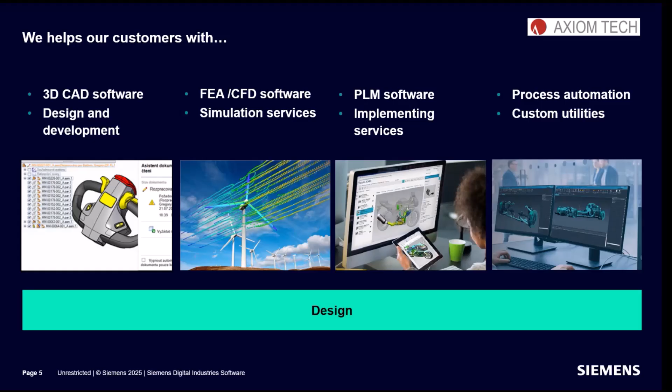The second main area of digitalization that we cover is generally manufacturing. We provide our customers a comprehensive Siemens CAM solution for generating machining code according to the 3D model of the parts. We also supply post-processors, which translate the NC code and ensure correct production of the part on a given CNC machine tool. We also supply verification software for machining.

This kind of software allows you to take the NC code and verify it for collision with the spindle or other parts of the CNC machine. It can then modify the machining NC code before production to make the machining more efficient, thus producing the part faster and without the risk of any collisions.

We also provide tooling management solutions, and as in the design area, we offer PLM solutions to manage processes and resources for production. We also offer PCM software implementation that can calculate the cost of manufacturing a part very accurately based on the analysis of the part's topology.

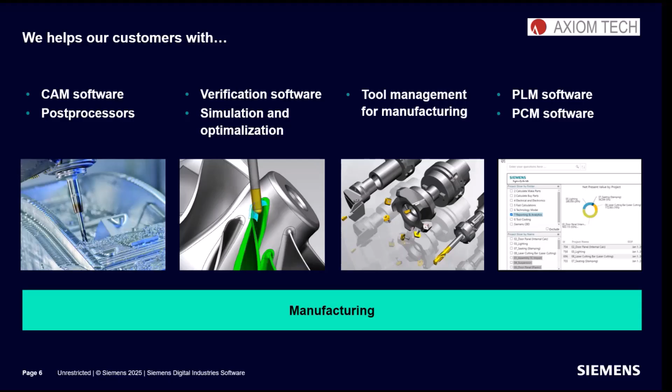The third area of digitalization in which we operate is software solutions for the digital twin of production itself. In these solutions, the customer has a complete 3D model of the production, which can be used to simulate the entire production process. This digital twin allows us to analyze all bottlenecks in production, such as various downtimes and carryover, and can offer optimal solutions to remove these bottlenecks and increase productivity. Simply put, it is a software solution for making production processes more productive.

We also offer solutions for advanced operational planning, which can be linked to various ERP systems to automatically schedule production orders for individual machines and workstations.

This enables the customer to schedule orders automatically, including eliminating downtimes, waiting for inputs, or missing resources.

Furthermore, within this area, we also offer software that is used to validate the design of the entire production line with robots and manipulators. This is a solution that will verify the feasibility of automation, robot reaches, or line flow, and can simulate the entire production line while also allowing offline programming of industrial robots and virtual commissioning.

In summary, for all these main areas, design, technology, and production, we can link data, automate data transfers between different software and ERP systems, simplifying the work of designers and operators.

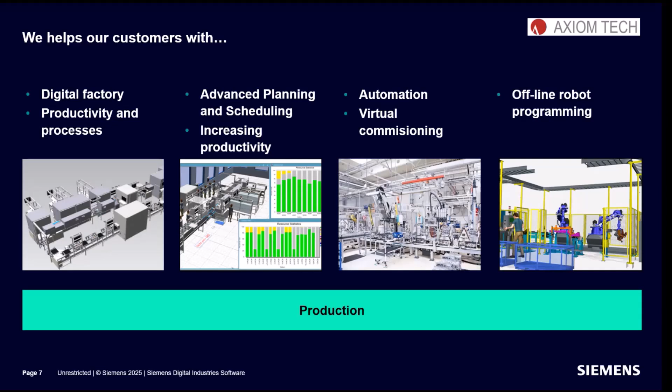So now let me introduce you to ROBE Lighting Company.

ROBE Lighting is a global leader in the world of professional lighting solutions. ROBE was founded in 1994 in the Czech Republic, and from the very beginning, it has been driven by innovation, creativity, and strong focus on quality.

The company designs and manufactures intelligent lighting fixtures that power some of the most impressive productions around the world, from concerts and festivals to television, theater, and architectural installations.

ROBE is also known for its commitment to developing sustainable, reliable, and future-forward lighting technologies. Over the years, it has grown into a respected brand trusted by lighting professionals across many industries.

ROBE isn't just a leader in lighting tech, it is a true global player. The company employs over 900 people worldwide, and its products are distributed in more than 100 countries through a strong network of subsidiaries and distribution partners.

ROBE handles its entire development process in-house, from research and design to manufacturing and testing. Everything is based at the company's facility in Valašské Meziříčí in the Czech Republic, and this allows ROBE to maintain strict quality control, remain flexible in innovations, and deliver consistent quality on a global scale.

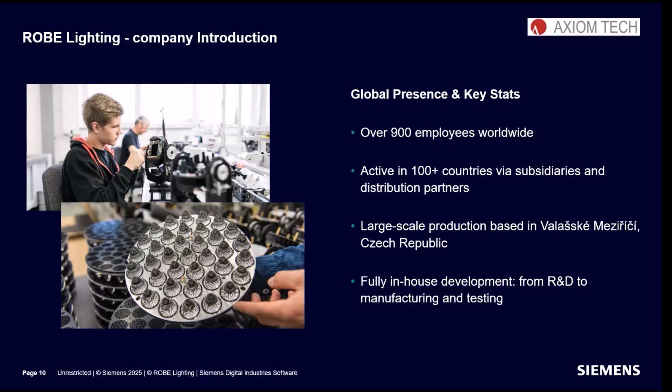Let me share with you one interesting fact. ROBE was one of the first companies in the Czech Republic that purchased a commercial desktop 3D printer, and they used it to print prototypes of plastic covers for its luminaires, which significantly contributed to accelerating product development.

So the key to ROBE's success is commitment to technological innovation. The company offers a full portfolio of intelligent lighting products, including moving heads, wash lights, LED effects, and many more. What sets ROBE apart? It is focused on durability, performance, and optical precision.

Their fixtures are engineered for demanding environments, from live concert stages with frequent handling to controlled broadcast studios. ROBE has earned its place at high-profile events like Eurovision, and it's regularly used in large-scale live shows, corporate events,

and permanent installations. The company also leads in energy efficiency and green design, working to minimize environmental impact and extend product life cycles. So simply put, ROBE is lighting the future with innovation.

So ROBE is also deeply invested in customer success. They offer comprehensive support, training, and education to lighting professionals around the world.

Their products consistently win awards for design and innovation, and their team continues to push the boundaries with each generation of lighting solutions. Overall, ROBE is a company that understands both creative and technical challenges and who can help elevate any lighting production to an unforgettable experience with their future-ready tools and products.

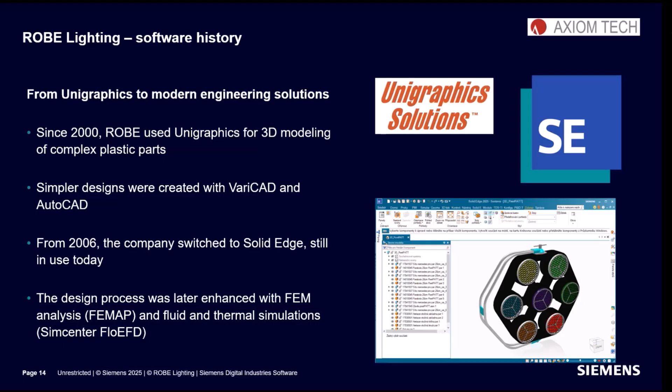This tool is essential for the design of LED module cooling, optimization of ventilation within enclosed fixtures, and simulation of heat dissipation from electronics, for example.

Now let's take a look at some practical use cases where ROBE's design department has successfully used Siemens Solid Edge software solutions to significantly help increase the productivity and quality of their products.

The first use case is about challenges in the design of bent sheet metal parts.

In the area of sheet metal part design, ROBE Lighting has long faced a challenge based on the high variability of the material used. Aluminum and steel sheets are processed in a wide range of thicknesses, and this variability in thicknesses and properties often caused issues in calculating the flat pattern shape of bent parts, directly impacting production quality and requiring frequent modifications. For these reasons, it was necessary for the design department to pay detailed attention to precise calculation of flat pattern shapes.

Based on practical experience and in cooperation with their production engineering department, designers developed an internal system used to correct the neutral factor according to the combination of material thickness, material type, and die used in production on the bending machines.

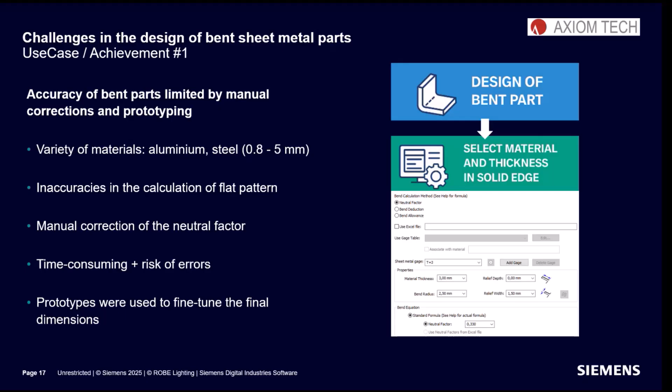With the release of the latest version of Solid Edge 2025, ROBE has taken full advantage of the new options for calculating sheet metal flat patterns.

The bend calculation methods are now controlled by a custom Excel spreadsheet linked directly into the CAD environment. Following this new functionality, the original in-house system has been redesigned to be fully compatible with Solid Edge 2025 and expanded to include the current range of materials and thicknesses processed, optimized in terms of data structure and loading speed.

The new version of this Excel spreadsheet now precisely defines the specific sheet metal properties and assigned adjusted neutral factor values for each combination of material and bending technology that ROBE uses in production.

This information was subsequently integrated into the company materials library in Solid Edge, resulting in data standardization and full automation of flat pattern calculation when creating new bent sheet metal part designs.

The process for designing a sheet metal bent part is now as follows: when creating a sheet metal part, the designer selects the appropriate material from the material library, including the thickness specification. Based on this selection, Solid Edge automatically sets the correct base material thickness and assigns the appropriate neutral factor values to the 3D model of the sheet metal part.

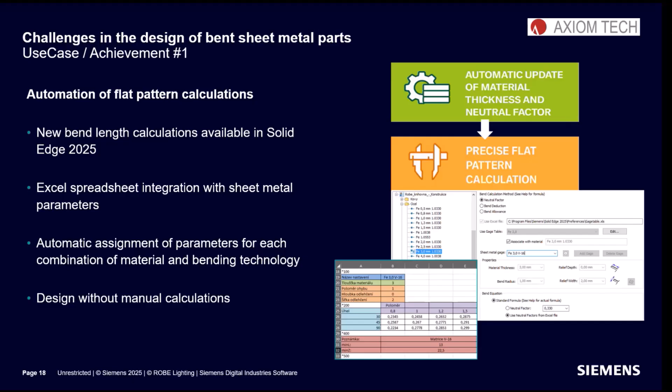With the implementation of this new feature in Solid Edge 2025, ROBE's design department has gained an important tool for more efficient design of sheet metal parts.

Full integration of flat pattern calculation according to real production conditions means an end to manual adjustment and experiments. The system now automatically selects the correct parameters and ensures consistent results across the entire development cycle.

The benefits are clear: fewer prototypes, shorter development times, reduced costs, and, most importantly, higher quality output data.

As a result, designs are prepared faster and more accurately, and the entire process of moving to production is smoother and more stable. By taking this step, ROBE Lighting has not only increased its productivity, but also strengthened standardization between design and manufacturing, which is key to repeatability, scalability, and future growth.

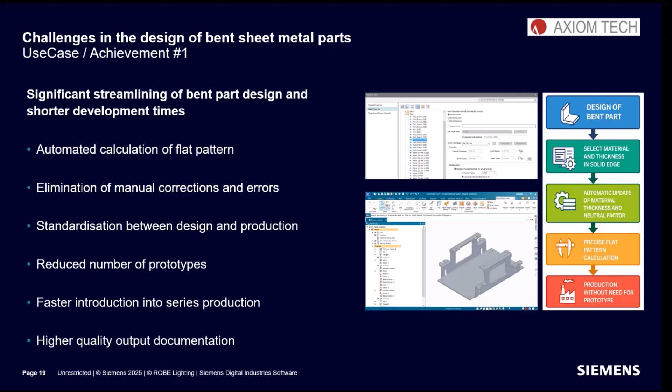Let's go look at the second use case. This second use case shows the practical use of simulation software to verify the structural strength of a particular design.

In order to increase the reliability of the analysis, two methods were used: linear static analysis according to the European standard, and advanced geometrically and materially non-linear analysis, which allows us to take into account the occurrence of plastic deformations.

The numerical model of the structure was created in FEMAP and Solid Edge Simulation. This numerical model of the assembly was defined by combining a mesh of tetrahedral elements, surface mesh, and 1D elements representing the bolted connections.

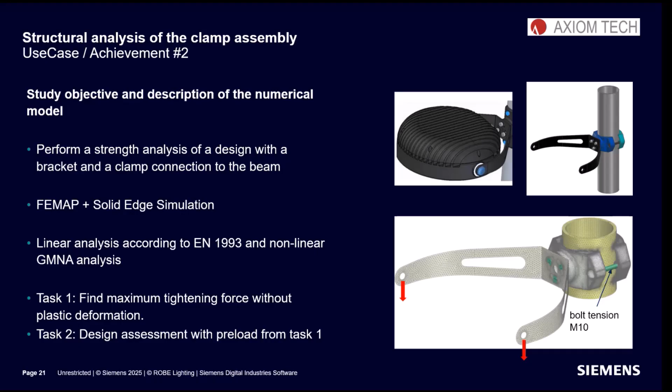So in the first part of the analysis, the objective was to find the maximum tightening force of the bolts to avoid plastic deformation during assembly.

Before the calculation, a tightening force of 30,000 newtons was considered. However, a limit of plastic deformation was identified at a force of approximately 24,000 newtons. After taking into account a requested safety factor of 3, the maximum safe tightening force was determined to be 8,000 newtons, which corresponds to a recommended tightening torque of approximately 21 newton meters.

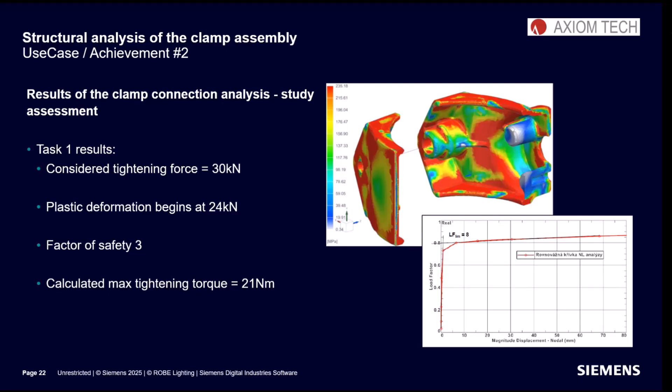The second part of this analysis focused on verifying the design of the structure under realistic loading conditions. That means the combination of self-weight load, the load from the mounted reflector, and the allowable preload of bolts calculated from the first part of this task.

The resulting stress, according to the von Mises criteria, was lower than the allowable stress for the stainless steel considered. The only area where the allowable stress was locally exceeded was the contact between the clamp and the support beam. However, this was a stress spike caused by contact, not a critical overload that would lead to failure. For these reasons, the overall design was considered satisfactory from a strength point of view.

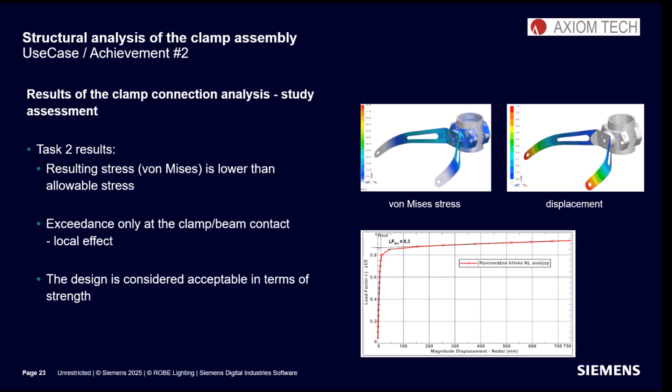This study successfully confirmed that the clamp joint design is suitable for mass production in terms of strength. The study set the safe limit of the bolt tightening torque and subsequently verified the design under operational load, confirming that the design easily meets the strength requirements.

Importantly, these results were achieved using modern CAE tools, namely Solid Edge Simulation and FEMAP solution. These software tools made it possible to accurately predict not only the overall strength of the structure but also local stress concentrations, eliminating the need for physical prototypes, speeding up the design process and increasing its reliability.

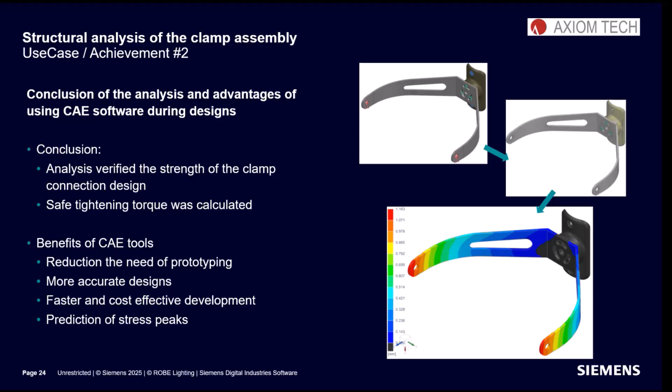Now let's take a look at the third and last use case that shows the practical use of a thermal simulation software to optimize the heat source cooling inside a luminaire.

The objective of this study was to design a more efficient cooling system for the heat source chip placed inside a new type of luminaire. Copper heat spreaders, heat pipes, and aluminum heatsink with axial fans were used to dissipate the heat. Solid Edge and Simcenter FloEFD software tools were used for this study.

One advantage of the software solutions used is the ability to perform analysis directly on a 3D model in the Solid Edge environment without needing to convert and transfer data between different software tools. Computational fluid dynamics, thermal, and flow analysis were used for this study.

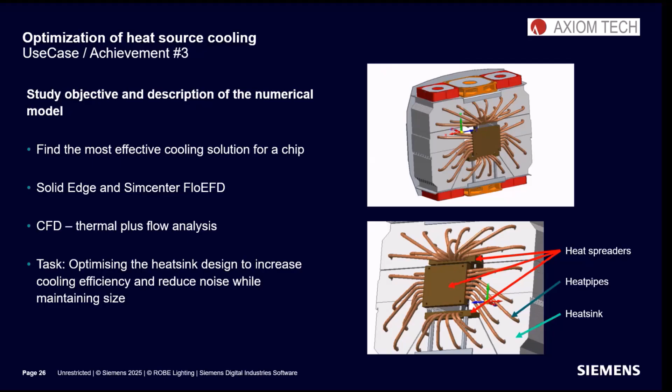The goal of this analysis was to find a cooling design that reduces noise from the fans so that they do not have to run at full speed. Another important condition in terms of structural design was to maintain the external dimensions of the entire cooling assembly due to the limited built-in space.

Two design variants of the heatsink were considered for the simulation, based on previously used heatsink designs. The first variant included 6 fans located on each side of the heatsink. The second variant considered 2 extra fans placed in the middle of the aluminum heatsink.

For analysis, a high-quality finite element mesh was created automatically with minimal user intervention. The density of the mesh is simply set by a slider, with local refinement and boundary layers defined automatically by the FloEFD software on behalf of the user.

The analysis found that when using the 6-fan variant, the total cooling surface area is larger compared to the 8-fan variant, but the airflow around the fins of the heatsink is slower. To achieve a higher airflow rate, more powerful fans would be required. So when using the 8-fan variant, the heat source is better cooled due to this faster airflow, even though the total cooling area is smaller compared to the 6-fan variant.

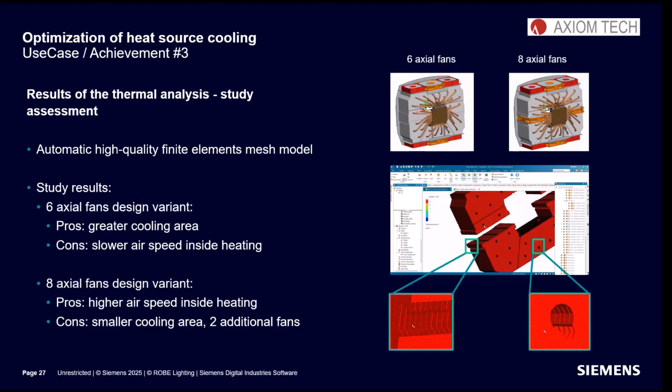Using fluid thermal analysis, possible design options for cooling the heat source inside the new luminaire were verified. This analysis showed differences between the considered heatsink design options, where the variant with 8 less powerful fans is more efficient in terms of cooling, as it guarantees more airflow and has 8% higher cooling efficiency than the variant with 6 more powerful fans. This simulation result was then verified and confirmed by measurement on a real heatsink.

By combining Solid Edge CAD software and Simcenter FloEFD simulation software, it was possible to perform this analysis, verify the behavior of the different design options, and evaluate which cooling option is more efficient. Again, as in the previous use case, this made it possible to eliminate the need for physical prototypes and speed up the design process.

Simulation analysis is not just a tool for verification, but is now a key element in efficient development of new products at lower costs. Simulation software tools shift development from trial and error to smart simulation-driven engineering.

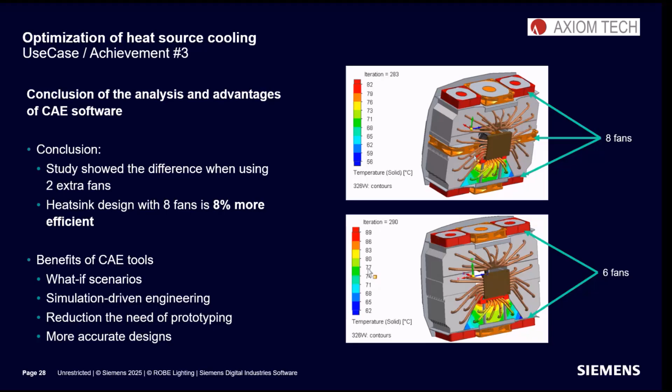Designing a world-class lighting system requires more than just software; it demands trusted tools. With Siemens Solid Edge, ROBE accelerates development while maintaining full control and confidence from concept to production. ROBE streamlined its development using tools tailored for plastic parts and sheet metal design, complex assemblies including electronics, stress and flow analysis, and built-in manufacturing logic. They have also significantly reduced the need for physical prototypes with Solid Edge, which helped them speed up the design process and increase the reliability of their products.

Thank you, we have reached the end of my presentation. Thank you very much for your attention, and please do not hesitate to contact me if you have any more questions. I wish you a pleasant rest of the day.